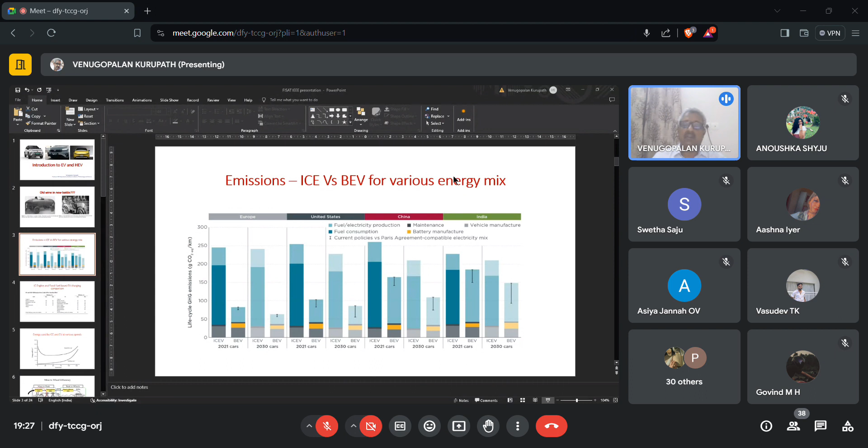Having seen the emission comparison and the efficiency comparison, now I think we should ask ourselves why the industry is promoting electric vehicles in such a big manner, and why are we all being encouraged to switch from IC engines to electric vehicles? That is what we should all ponder about before we start looking at the details of electric vehicles, types of electric vehicles, and implementation of electric vehicles. So this is the picture that all of us should be looking at.

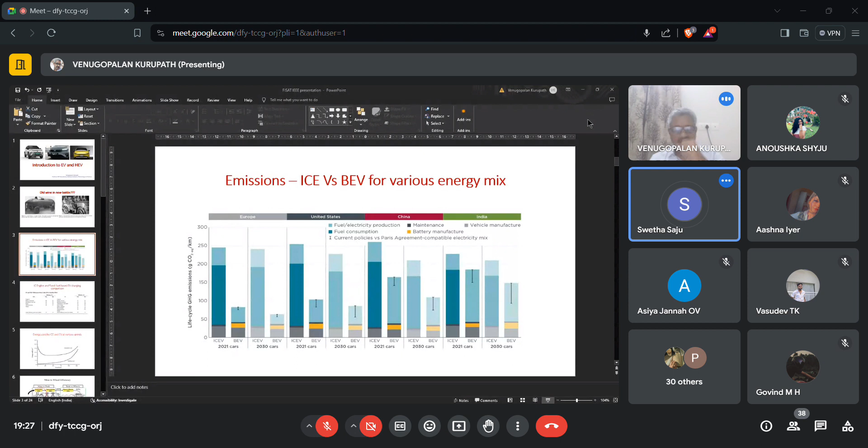Let me look at one more graph. I'm trying to show you all aspects of comparison between electric and gasoline. Still the blue graph, it is still on the blue graph. Okay, I don't know, one minute. Is it changing now? Has it changed? It's not... yeah, on it has.

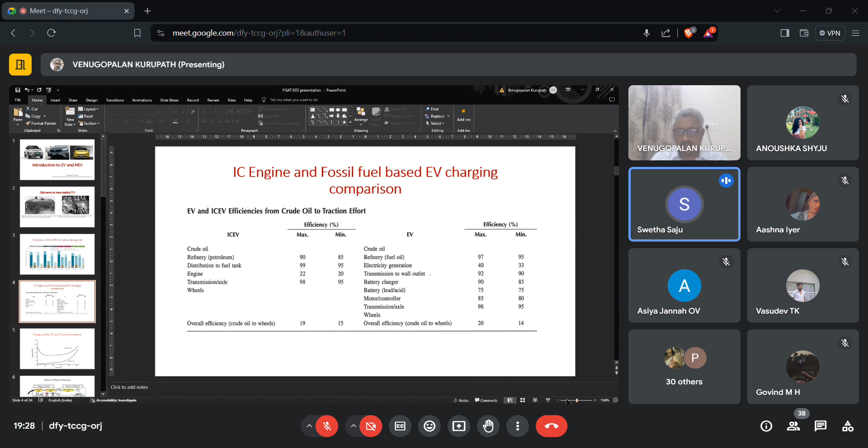It has been IC engine and fossil fuel comparison. Maybe I can just leave it like this and may not have the full view. Maybe I can do it like this. And if I change it now, is it changing? I am changing it, yeah, now, so it's changing now. Okay, okay, I think I will leave it like this now, because if I put it in slideshow, I think it's not changing. I don't know the exact reason why. This is fine. Okay, thank you.

So this is what I was trying to talk about. I think you only heard my audio, and you didn't get to see the figures. So what I was trying to talk, I'll quickly restate what I was trying to say. I was trying to compare the energy efficiencies between the IC engines and the electric vehicles.

You can see the IC engines when they start from the crude oil stage, and when they reach the wheel of the vehicle, they have an energy efficiency going from 19 to 15%. These figures are at least 15, 20 years old, so there have been minor improvements. It might go up to 20, 25% now on the upper side.

On the electric vehicles, again starting from fossil fuel instead of crude oil - you can read it in the Indian context as coal - you find that the energy efficiency, overall efficiency, is going from 20, 25% to 15, 20%.

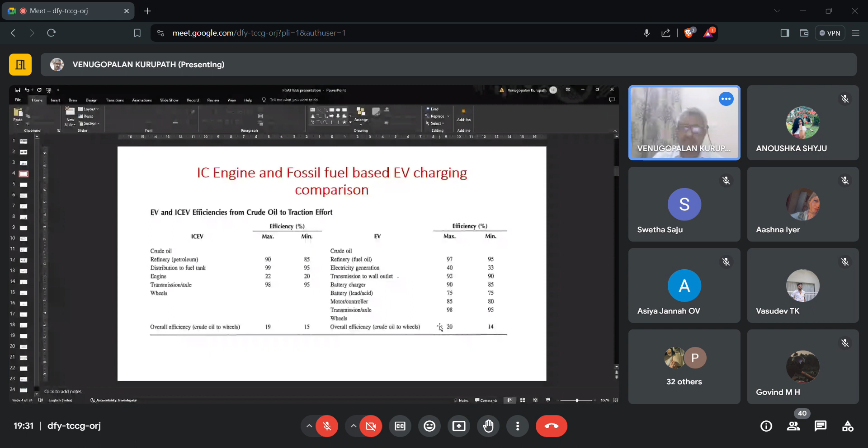Okay, so has it changed now? I'm now showing a slide where we have energy used by... Yes, sir, information please. Hello. Yes, sir, yes, sir, we can see.

Yes sir, pardon? It's visible for a minute and then disappears. Okay, I'll try it once more. Can you see it now? Yes sir, we think we can see it. Is my voice okay? Not very good, but is it still okay? No sir, now it's okay, it's clear. Fine, okay, thank you.

So we'll take a quick look at this. What this slide tries to convey is that if you start from 100% of energy, by the time it reaches the charging point of an electric vehicle, the energy has dropped, and then it drops to 23% by the time you go to the wheels. When you take a look at the same situation in IC engines, we start from 100% and 80% is available at the pump. Due to the very inefficient IC engine, that conversion is very inefficient, so the 80% drops to 13% to 16% on the wheel.

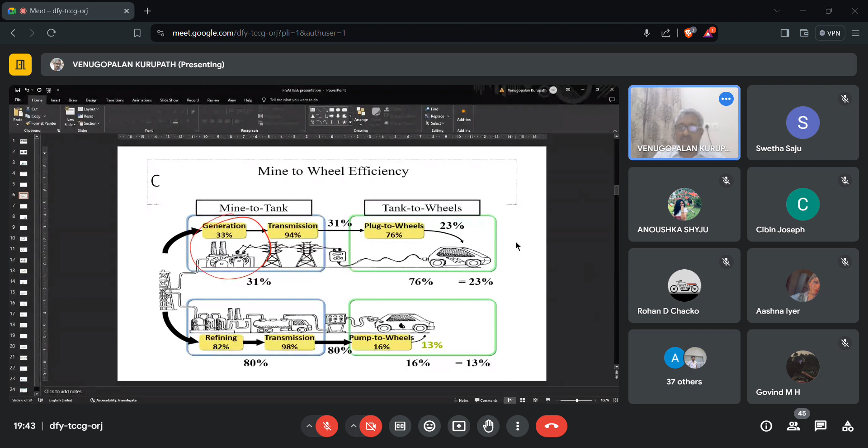So 23% on the electric vehicle and 13 to 16% on the IC engine vehicle. That is the actual difference when you try to look at the energy efficiency of the electric vehicle - the whole energy efficiency, not of the vehicle alone, but from generation to the wheel, and from crude oil to the wheel in both cases. So that is the comparison we have in terms of energy. We don't have very big differences, of magnitude of 2 or 3, between IC engines and electric vehicles. That is what we should look at.

This I think we can skip because we don't have time now. So if you look at EV adoption, whenever we look at EVs and the hype created around EVs, we should always see how the EV is growing in terms of the total vehicles.

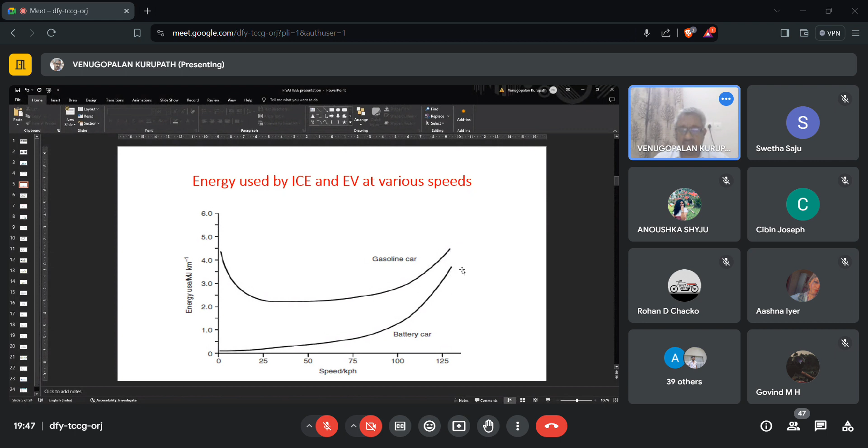So, if we have already seen, I already tried to present what is the energy used. This figure shows that at very low speeds, the battery electric vehicles have a huge advantage because they use very low energy. As the speed increases, the difference in energy used by the gasoline car and the electric battery car is reducing. The gap is reducing.

So what this tells me is that the electric vehicle is most suited for urban driving cycles because the speeds are low, and at low speeds the battery electric vehicles have a huge advantage compared to the IC engine. So this is one chart that we should all remember, because when we have to choose a vehicle, it depends on what kind of driving cycle you are going to have.

So what is the type of driving cycle that the vehicle is going to encounter? Depending on that, you will find a large difference in efficiency between the electric vehicle and the IC engine. If you are in a city, keeping low speeds, encountering start and stop traffic, then we find the electric vehicles are the most advantageous - it is at its best in these conditions. If you are doing very high speed highway runs, then the advantage we have is not so much. So that is what this curve tells you.

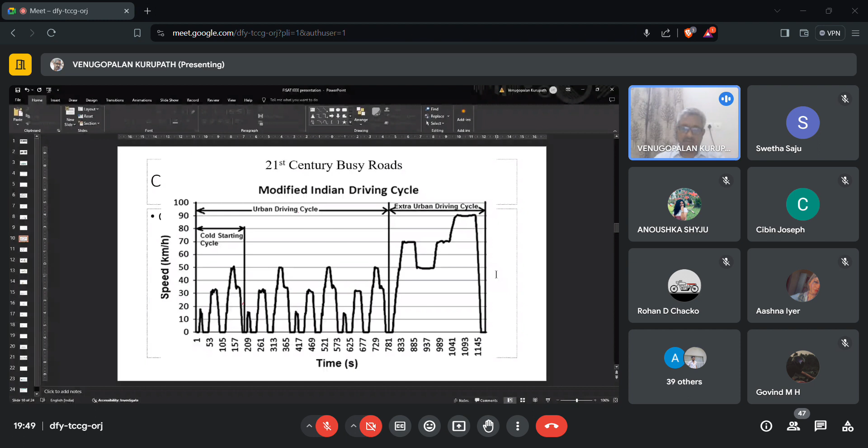So when we look at the storage technologies in an electric vehicle, we have three main components: one is the battery, the other is the power electronics converters and inverters in the electric vehicle, and then you have the electric motor. The electric motor is a well-known technology. There are a few types of motors that have come recently - we have brushless DC motors, switch reluctance motors, permanent magnet synchronous motors, and different types of motors. But motor technology is well understood and well proven.

So when we look at the history of electric vehicles, we have seen that what held the electric vehicle back was the battery technology. Power electronics has also grown - initially we didn't have this kind of power electronics and control capabilities. Now the control and power electronic areas are well proven and well established. So what is remaining to be improved upon is the battery technology.

So we have a chart for batteries and different kinds of electric energy storage. We can see lead acid batteries having a density of 100 kilojoules per kilogram, or 30 watt hours per kilogram, which is very low compared to the fossil fuel energy density. Then we have lithium batteries, six times better, but still very low. Compressed air and ultra capacitors and other types of electric storage are very low. And at the bottom, you can see the gasoline energy density, that is something around 43,000 kilojoules per kilogram.

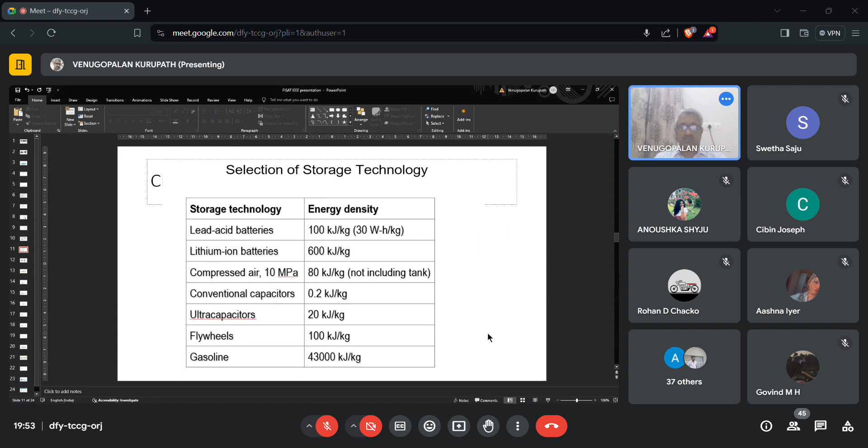Okay, so here we have another chart which tries to convey what kind of energy is being converted. If you have 100% of energy in the fuel tank, by the time it reaches the wheel in the IC engine case, it is 13%. We already saw this in the previous slides.

Out of that 13%, aerodynamic drag or air resistance takes 3%, rolling resistance of the wheels is 4%, and braking effort takes 6%. So on average, from 100% at the fuel tank, by the time it reaches the drive line it is 16%, and from the drive line, with some losses, by the time it reaches the wheel it is 13%. So this is the conventional IC engine energy transfer from the fuel tank to the wheel.

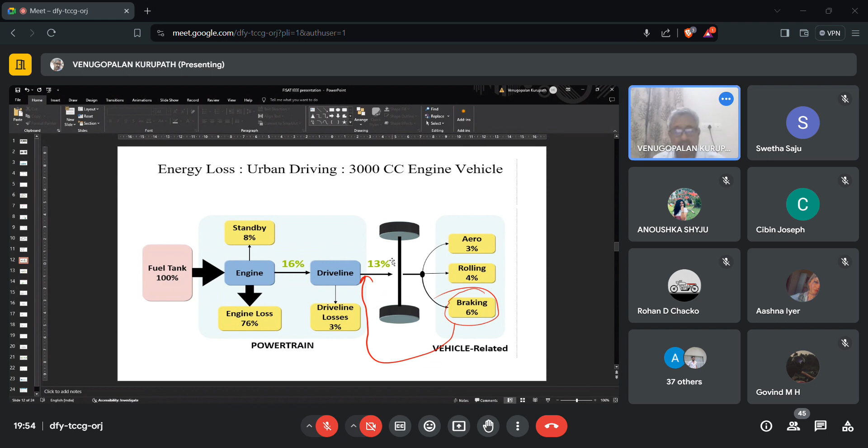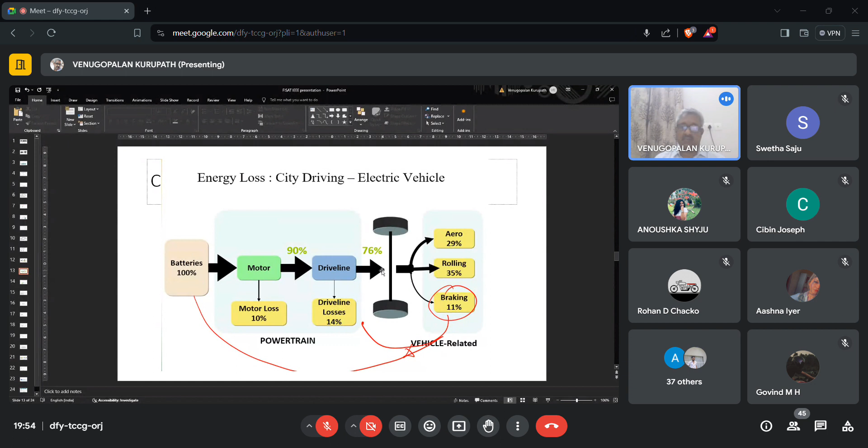Okay, so... Sir, your mic is mute. Okay. When was it muted? Just now? Just now. Okay, fine, fine. Okay, let me...

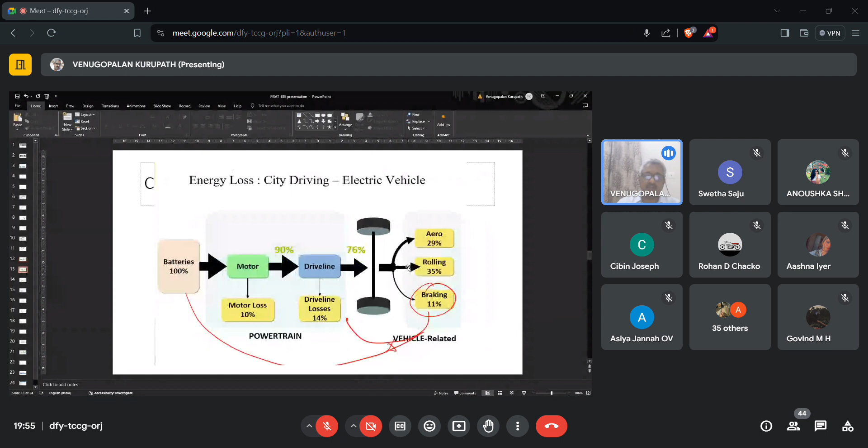Okay, so I was talking about this electric vehicle efficiency. In the previous slide I talked about IC engine efficiency, and this slide shows that from the battery to the wheel, 76% of the battery energy is available at the wheel. So the losses in the transmission and conversion are very low, whereas in the IC engine we find it goes from 100% to 13%. So there is a major loss of energy in the IC engine and the drive line. That is the comparison between the electric vehicle and the IC engine vehicle.

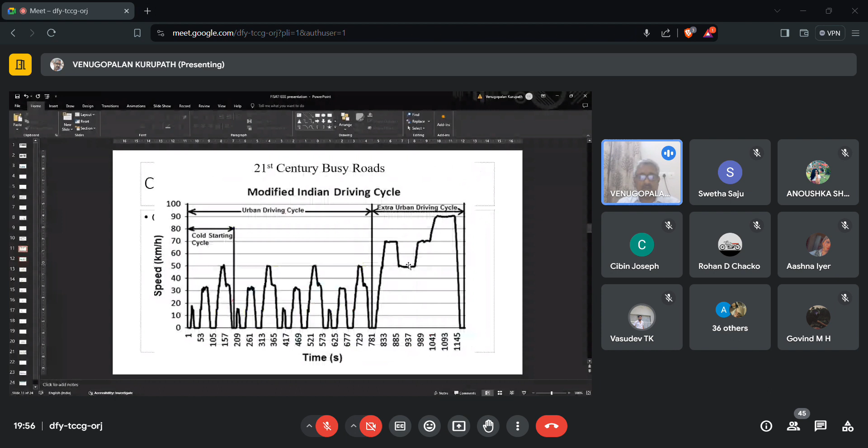Okay, I think I can skip this and go to the classifications of electric vehicles. Now we have seen in all the previous slides why we should go for electric vehicles, and what kind of comparison we should look at. We should look at all these previous slides carefully before we move into the classifications and specifics of hybrid and electric vehicles.

The definition of an electric vehicle is a vehicle which has an electric motor instead of a conventional IC engine. Any vehicle which has an electric motor providing tractive effort, or the power to move the vehicle, is classified as an electric vehicle. Under this general classification, we can have battery electric vehicles, hybrid electric vehicles, plug-in hybrid electric vehicles, and fuel cell electric vehicles. So there are four different classifications under electric vehicles.

Battery electric vehicles are the most promising, and all the Indian vehicles we see on the road are more or less all battery electric vehicles. We have a few hybrid electric vehicles, but the kind of electric traction available in these vehicles is at best a mild hybrid. We don't have very strong hybrid electric vehicles in India. So all the Hyryders, Hycross, and similar vehicles on Indian roads are either micro or mild hybrids.

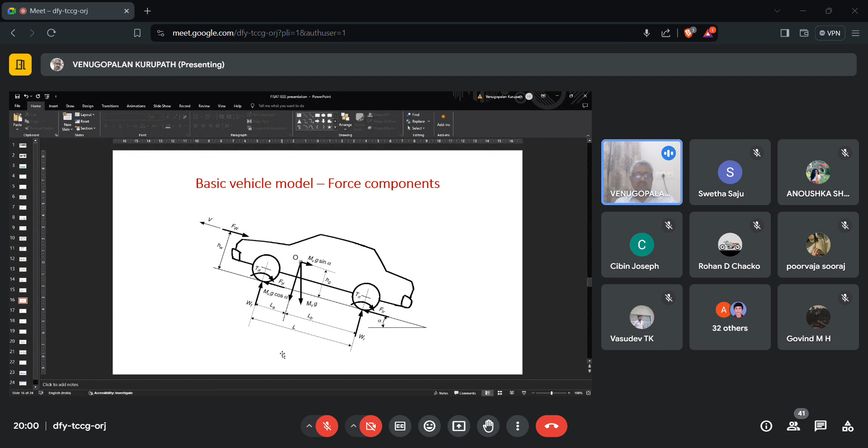So in a conventional geared engine, the engine is having a definite speed range, maybe going from 700 rpm to 6000 or 7000 rpm. So that is the kind of range that is available, and then that is converted into the vehicle speed.

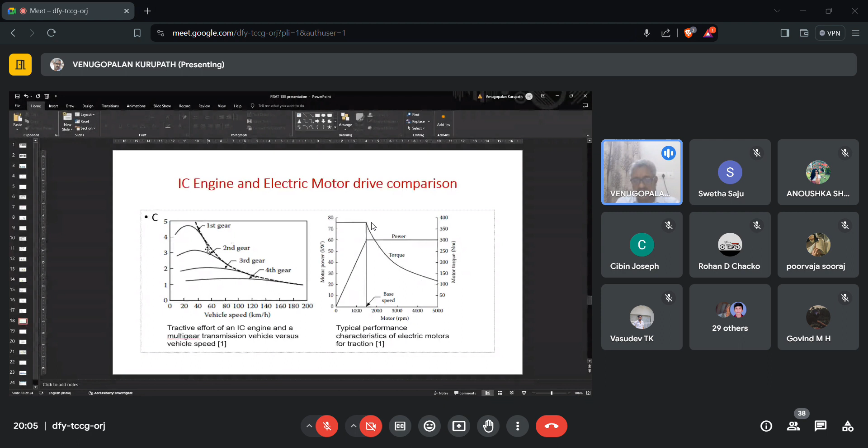Okay, so this is the IC engine versus electric drive comparison. You can take a look at the constant torque region and constant power region here. So in the constant power region, the torque will fall, but that is okay because the vehicle demands that kind of a characteristic. So that we have seen in the previous curve.

So this is a typical torque profile of a 60 kilowatt electric motor. You can find the 60 kilowatt electric motor has a torque curve that is very apt for a vehicle application. So you can find with different gears, you can incorporate different gears into this torque speed characteristic, and then you can have different gear-like transitions, and you can cover the entire vehicle operation within one motor characteristic. So I won't go into any details of it.

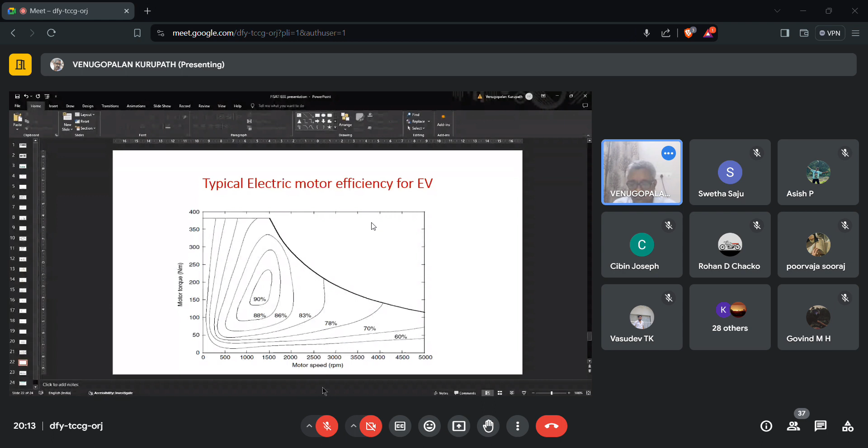What I have tried to do is, there are many courses, textbooks, and other material available on the technical details of these vehicles. What I've tried to present is, because we are all IEEE members, we should have a bigger picture of this whole field before going into details. So I tried to concentrate in this talk on the why of this whole technology and the Indian specific context of electric vehicles.

There is a big petroleum lobby and automobile manufacturers group, which is very influential and powerful, and they influence most of the policy decisions we encounter in government policies. Not only in India - in the whole world, there is a big petroleum lobby and automobile manufacturers lobby which is invested in IC engines. So a lot of research and material that we see is influenced by their policies.